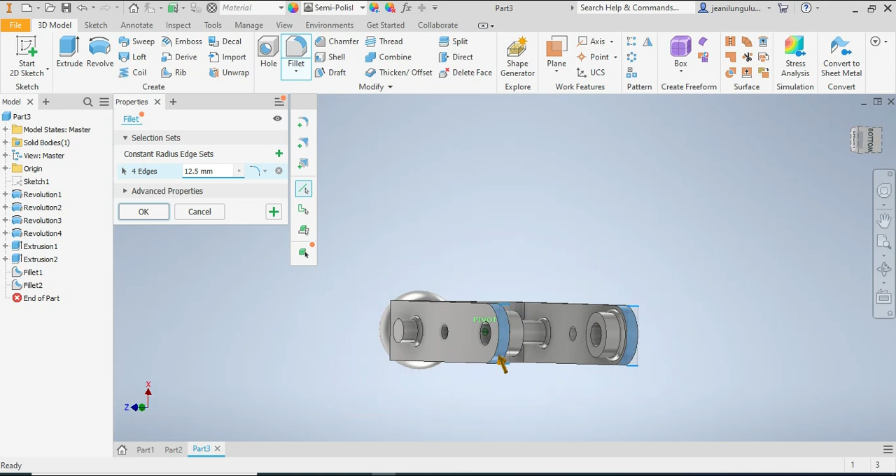Let's say that you have to draw this drawing in front of us. I'm going to show you how it is. We don't know if this is an assembly or what, but I'm going to try to draw it as a whole, as one drawing, since I didn't say it's an assembly. So I'm going to start a new sketch, metric, standard millimeter, and click create.

Once I'm in here, I'm going to go for sketch and start with a line. This line here is for guidance, just a reference one. I want it to be 400 millimeters. Remember, it's just for reference, you don't have to draw this, but it's easier this way.

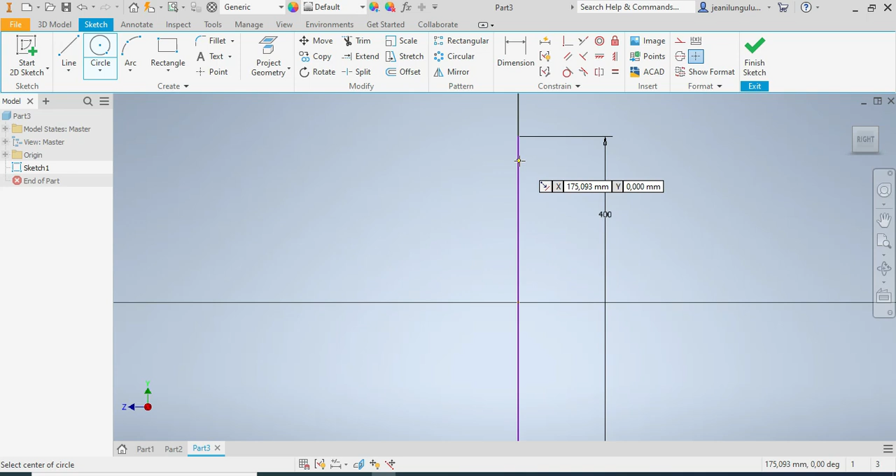Okay, now I'm going to go for a circle. There is my circle, and this one needs to be 33 millimeters.

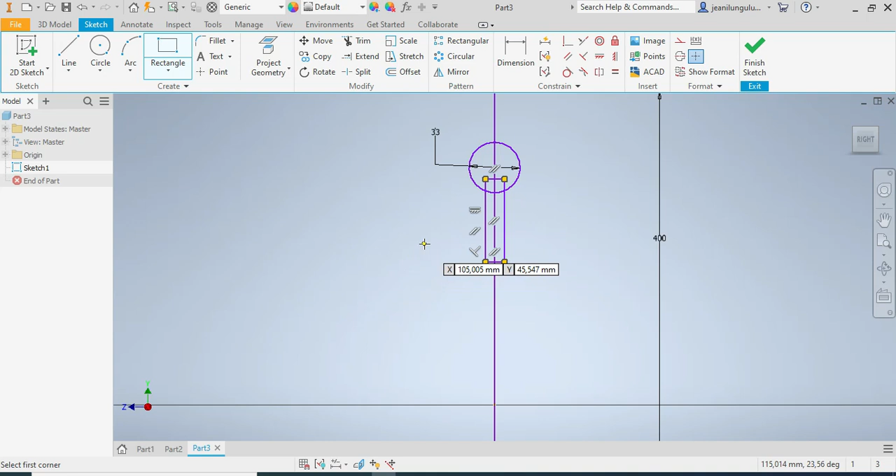Then I'm going to go for this rectangle, like this. And again, another rectangle, this one will be like this. So now I want from there up to there to be 38 millimeters.

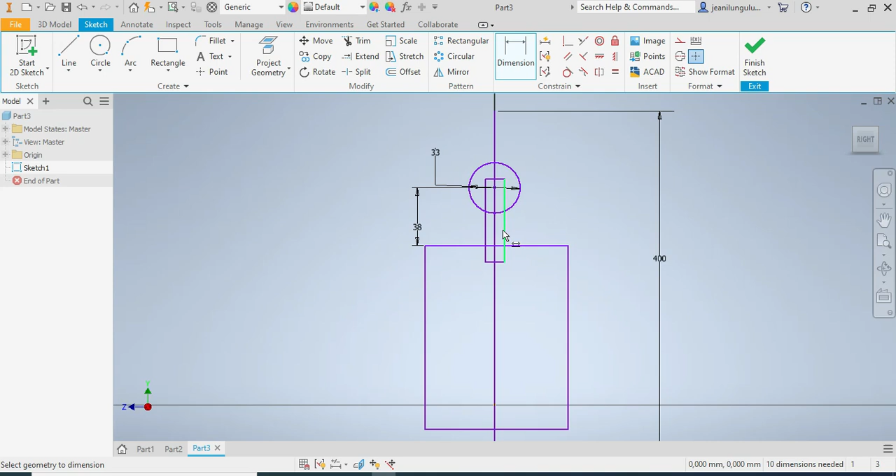And I want this one here - how long is that? We're going to come back to that later. So I'm going to draw another rectangle again, there goes that one. From there up to there, that one needs to be 5 millimeters.

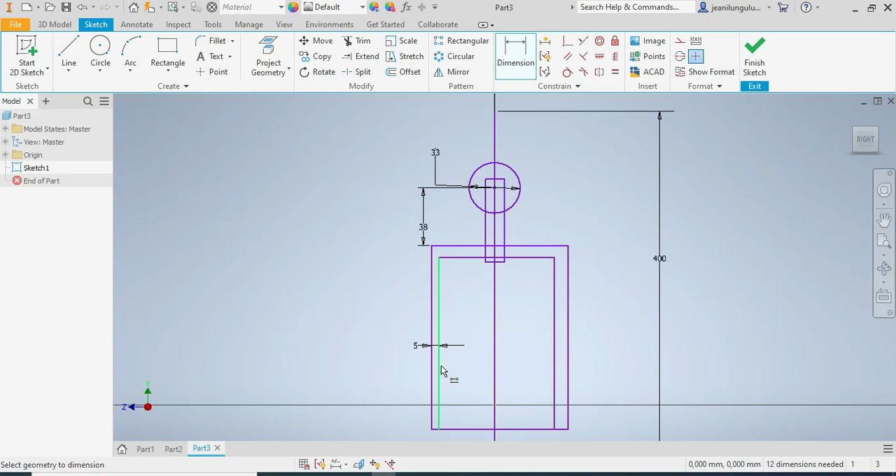And from there up to there, that one needs to be... 19 plus 8, which is 27. So that needs to be 27. And I'm going to make sure that this one is 10 millimeters. And from there up to there, that one needs to be 5 millimeters - you see it moved, so 5 millimeters.

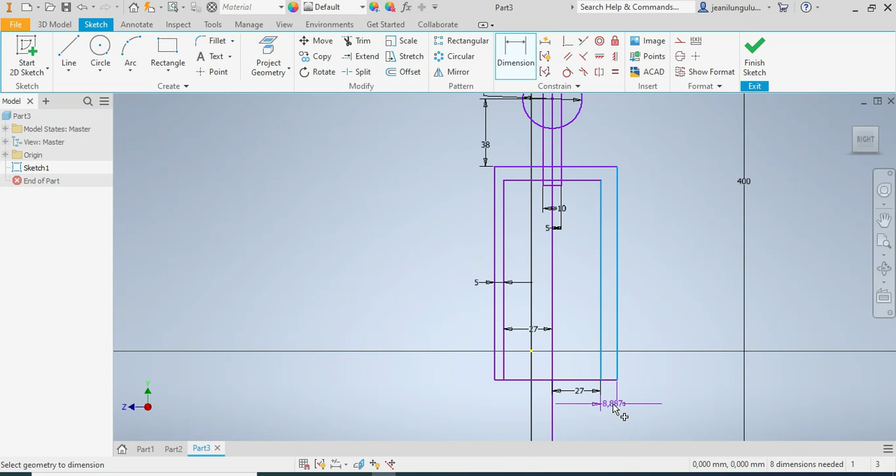Now I'm going to go for this one. This side as well, this one needs to be 27, so that needs to be 27. And that one needs to be 5. Don't worry if your drawing is moving, it's not a big issue. You can still click on escape and click there to bring it back. This is up to you, so it's not a big issue, you can bring it up to there.

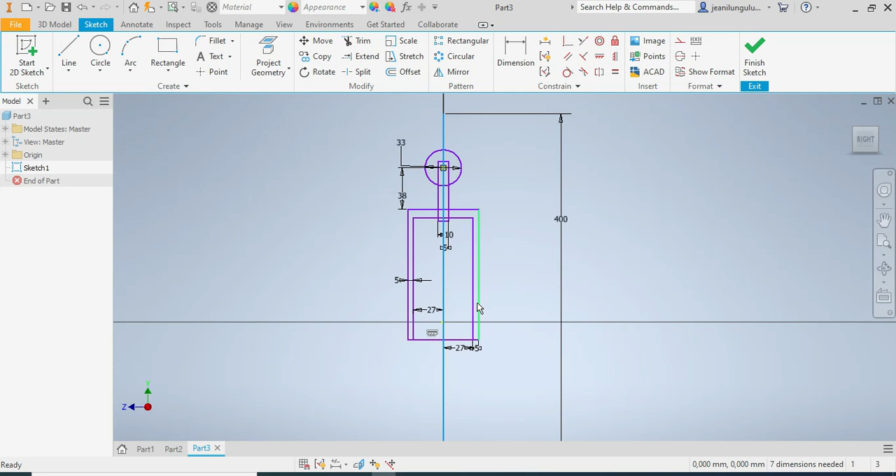Once you have that in place, what you're going to do now is go for these parts here. I'm going to draw a rectangle, there is my rectangle, I'm going to draw it like this. That's one plus that one. You can follow me step by step, it's up to you.

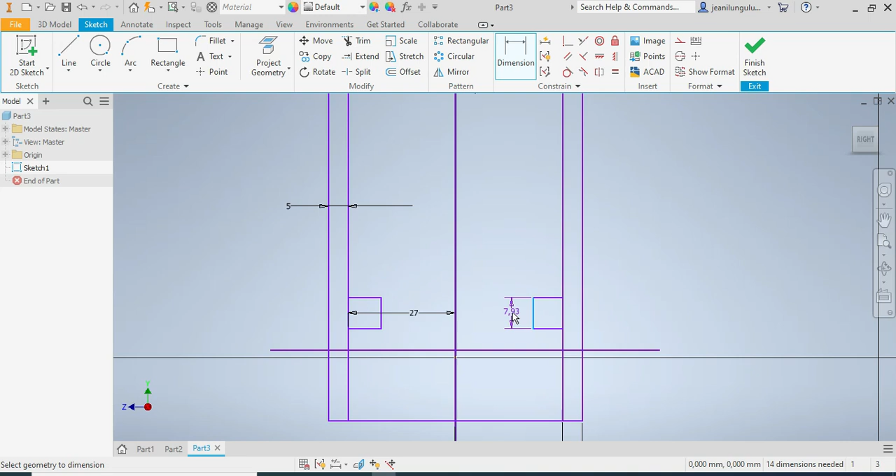So now I'm going to have this axis there. I want this one here to be 19, so 19 divided by 2 is 9.5. 9.5 minus 5, that will be... 4.5. That will be 4.5.

So 9.5 minus 5 is 4.5. And this one here will be 8, and that one will be 8 as well. So this is 4.5, as you can see.

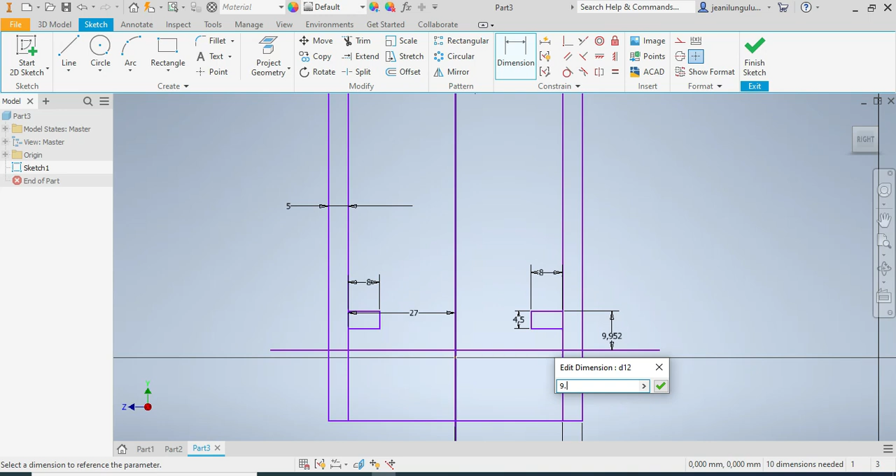What I want now is from there up to there to be 9.5. So that needs to be 9.5. The same applies there - 9.5, let's see, yes, 9.5.

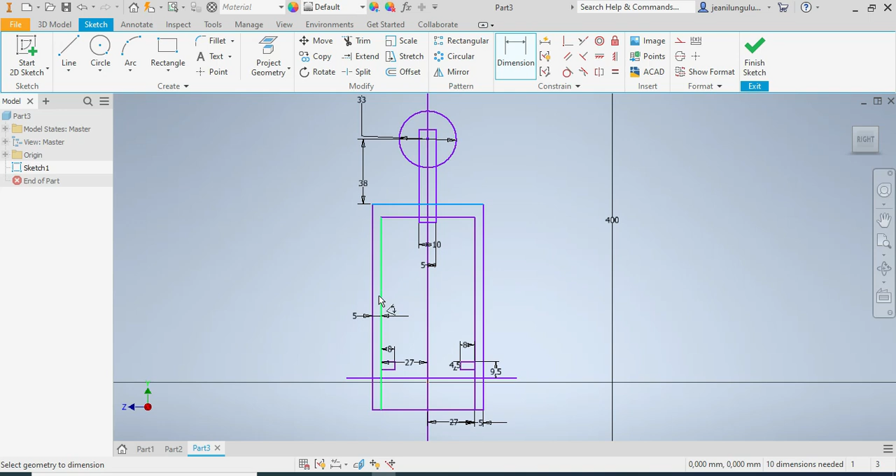Once I have that in place, the next thing I need to do is figure out what dimension do I need. From there up to there, that should be 84. Enter, that should be 84.

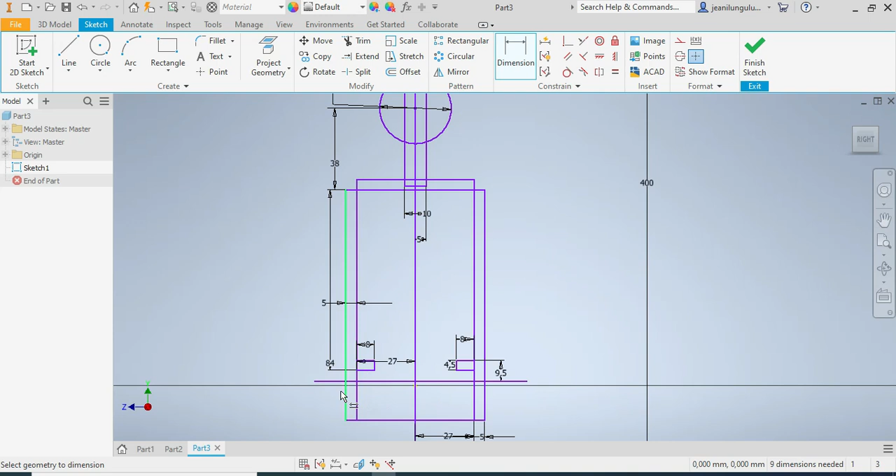What else do I need? I think I have that one. And now I want this one here to be... 101.5. Enter. So once I have that in place, okay.

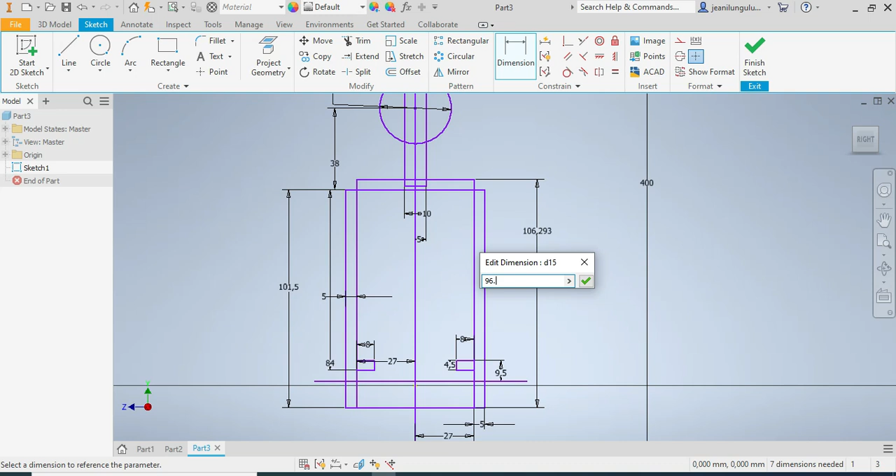So I'm missing that one over there. So this one needs to be... that's 101.5 minus 5. So that one should be 96.5. Enter. That is great.

So the next thing I want, I'm going to give dimension to this one. This one here can be 54, so let's make it 54. But I'm going to have to pull it down. So that's one, let's see how big it is now - 90.8, I can make it 80. Let's click on it. 80. Enter. Okay.

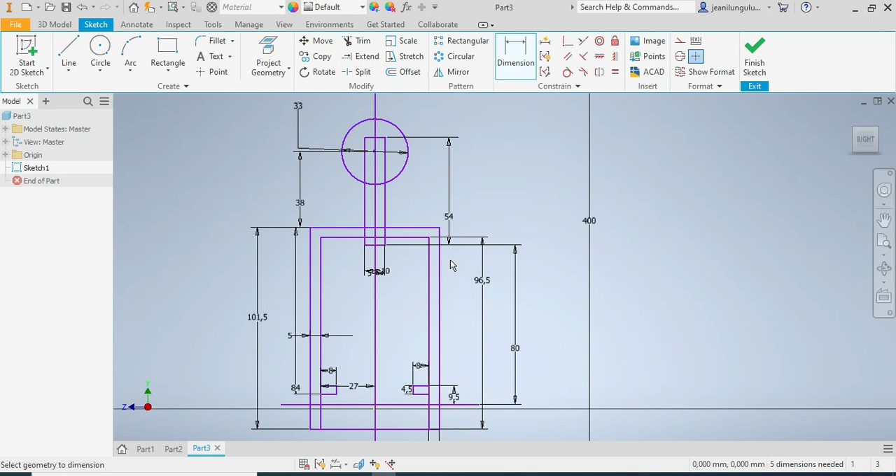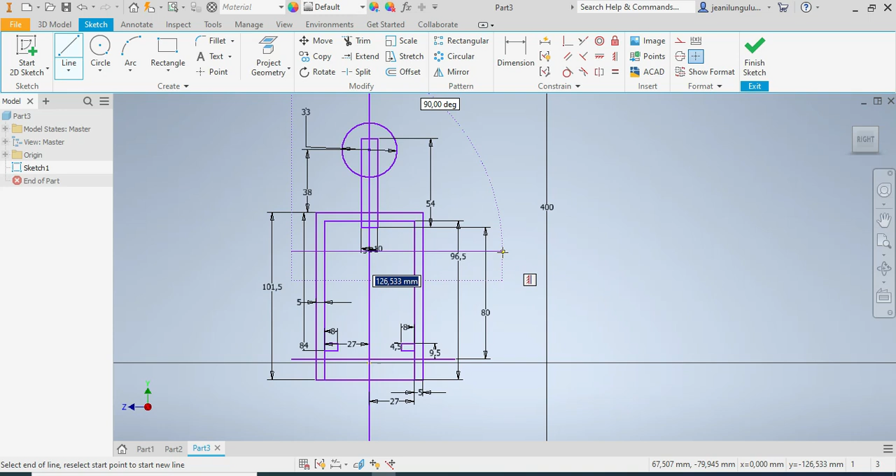Once I have that in place, I think what else do I need? I think I have everything that I need - I have that one, I have those ones. So now I need this. I'm going to draw first, let me go for this line, I'm going to have this line there. These lines that I'm drawing are axes, just there for guidance. I'm going to go escape, then I'll have this one.

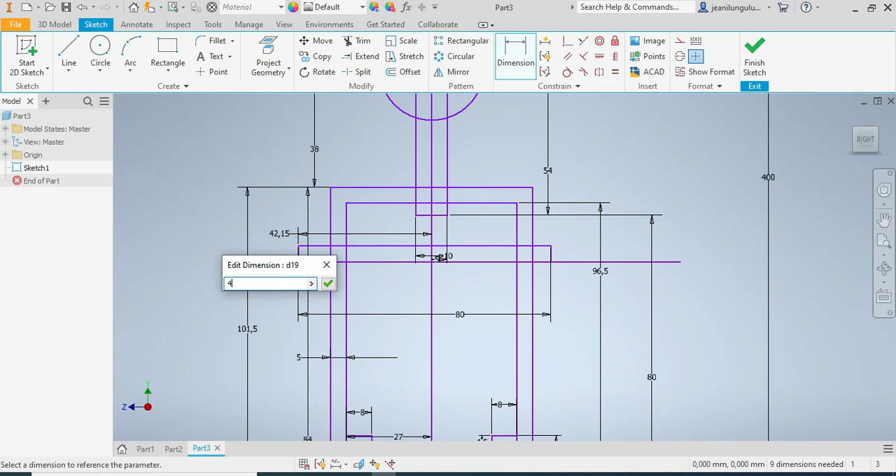Let's go like this, that is fine. So that one needs to be how much? Let's go for 80. 80 is okay, let's go for 80. Enter. Then from there up to there, that one needs to be 40. So 40, that's great. Okay.

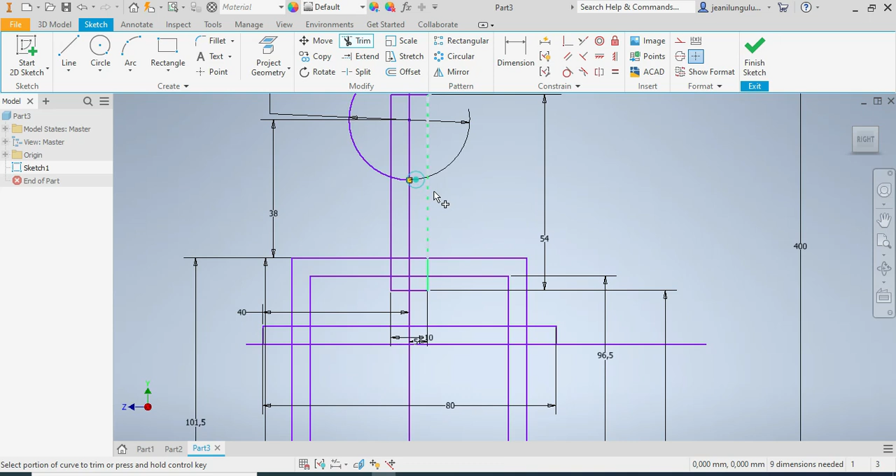So again, supposing that this one is not an assembly, okay? According to the information that I have, it does not say that it's an assembly. So what I'm gonna do now is trim what I need. I'm gonna trim this part, I'm gonna trim this part as well, I'm gonna trim this part, right? I'll come here and trim this part, that part. Escape. You can just click on it and say delete.

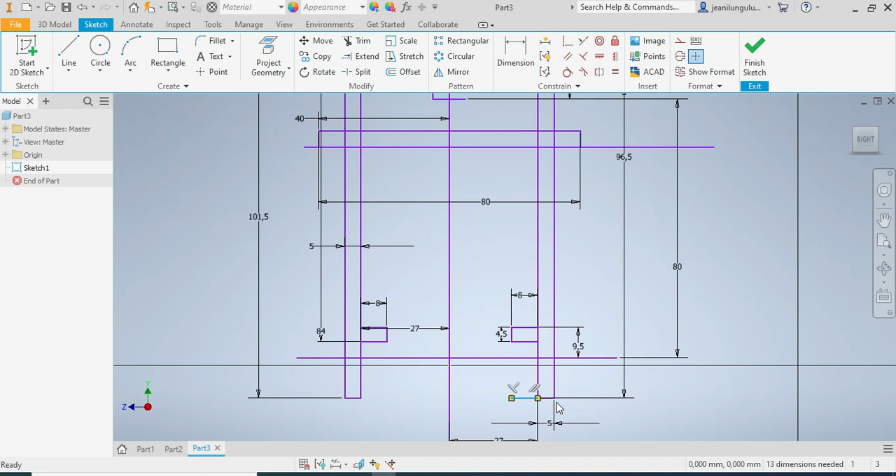Okay, so once you have that, what you can do next is trim this part as well. So that's one, okay. Trimming that part, escape, so just click on it, say delete. Alright, I think that's it, right?

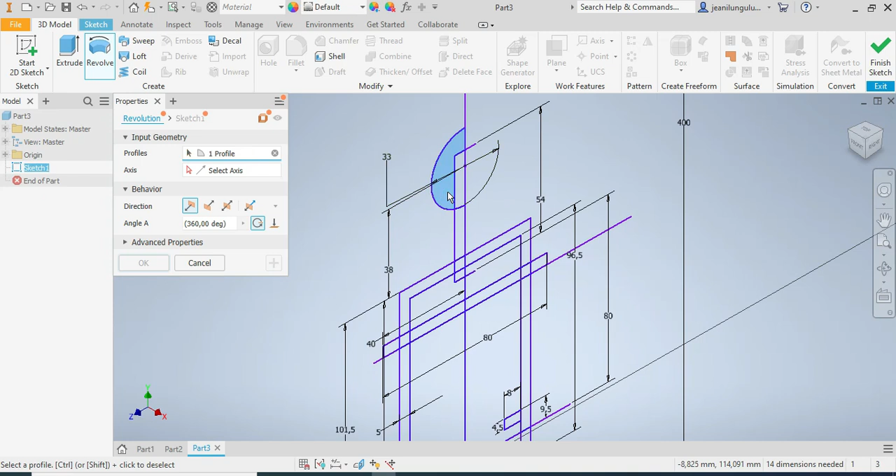So what you can do now, as I said, you can either click finish sketch, does not matter. So you go into 3D model, and then you go revolve. Okay, so first I'm gonna revolve this part, I'm gonna revolve that part against which axis. You're gonna click on that axis, so that axis, you say okay.

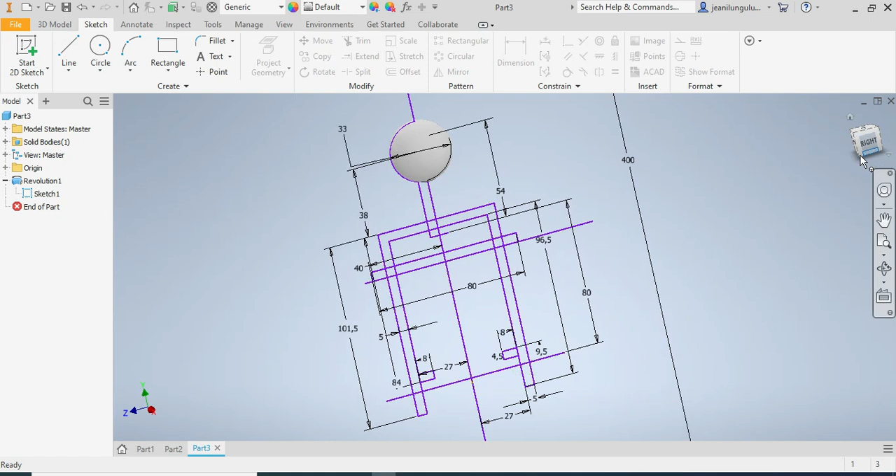So once that is done, you're gonna see the drawing is gone. You're gonna come there, you go on sketch, you right click, you say visibility on. So once the visibility is on, you come here again, okay, to the model, you click on revolve.

So you want to revolve this part here, that spot, against this axis, okay, against that axis. So what you can do is you click on there, you say revolve. That is revolved, don't worry about it, you're gonna see how your drawing will be like.

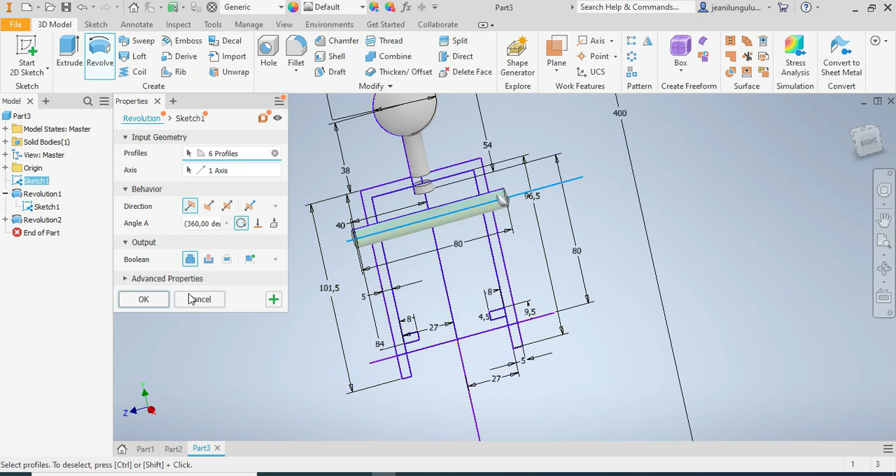So that is done, again you click on revolve, so you want to revolve this spot against this axis, okay you see, so you have that one. Revolve again, so you want to revolve this spot and that spot against this axis. So that is done, that is done, sorry, so you can see that.

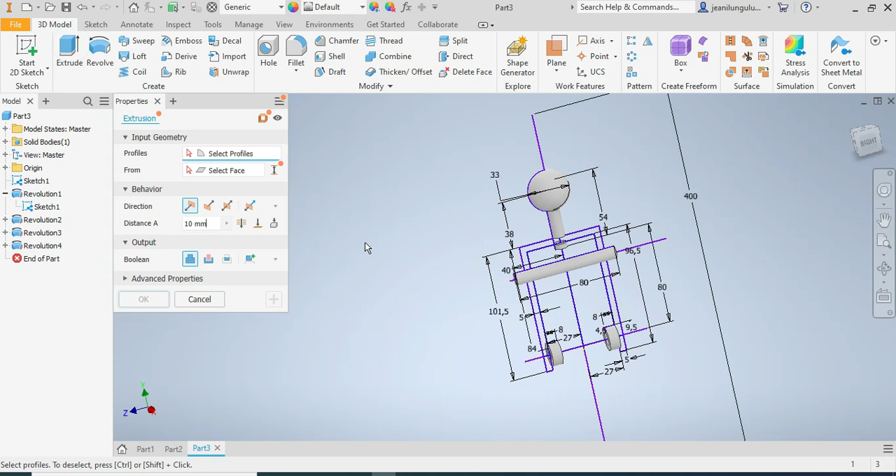You say okay, so the next thing that you want now is to extrude. So you want to extrude this part here, this whole part, you can see. So now you want to extrude it by what? 25 millimeters, so 25, okay.

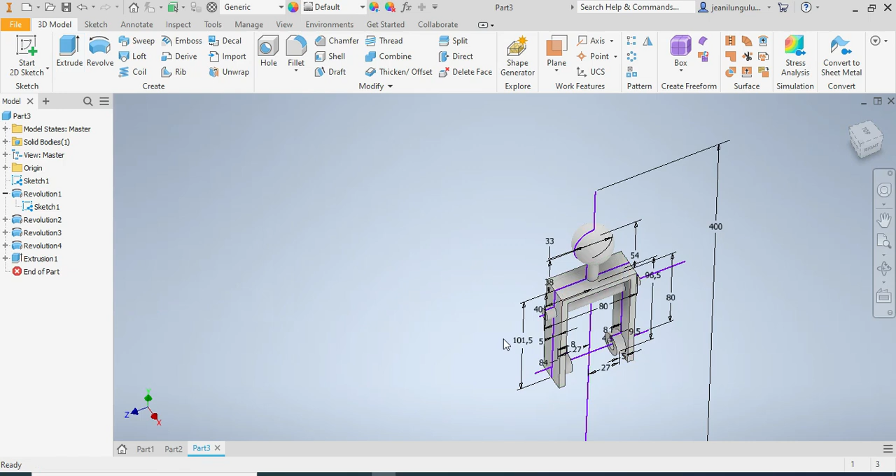But you need to go both sides of your main plane, so you're gonna click on there, now it goes that way, symmetric. Now you say okay, so now that you have that in place, right? So what you can do next now is come here, click on visibility, say visibility off, right? So once the visibility is off, this is how your drawing looks like, but you're not done yet, right?

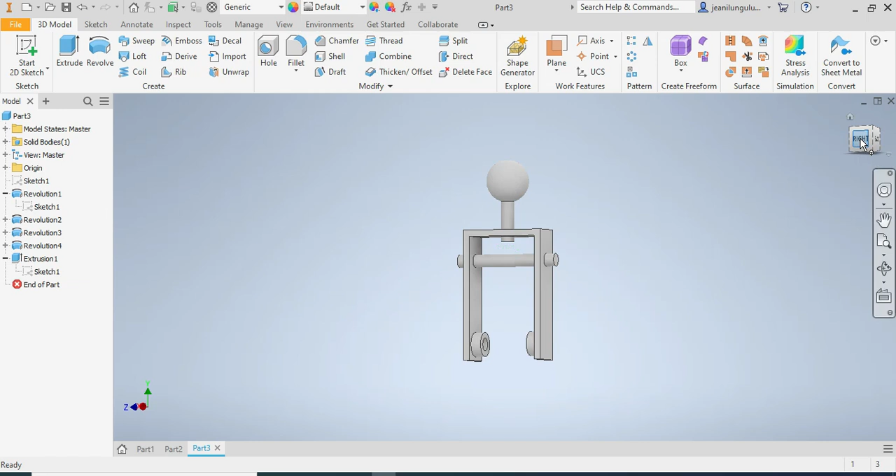So next, what you need to do is come for the drawing here. Okay, so you click there, you say new sketch. Okay, so you can even do like this, you don't have to worry about the next thing. So now you can see you have that one there.

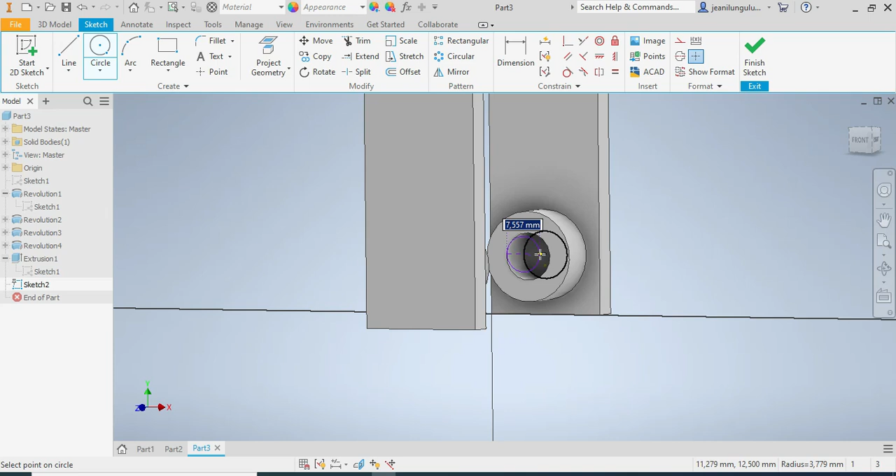It matches there, okay, once you give it the dimension, you're gonna see that it's gonna be okay. And then you come there as well, we do another drawing there. That one there needs to be what, 6 millimeters, so they need to be 6 millimeters. That one needs to be what, 10 millimeters, so that needs to be 10 millimeters.

So enter. The next thing we want is from there up to there, that one needs to be what, 36 millimeters, 38, so that needs to be 38 millimeters. So enter, once you're done, you come on 3D extrude.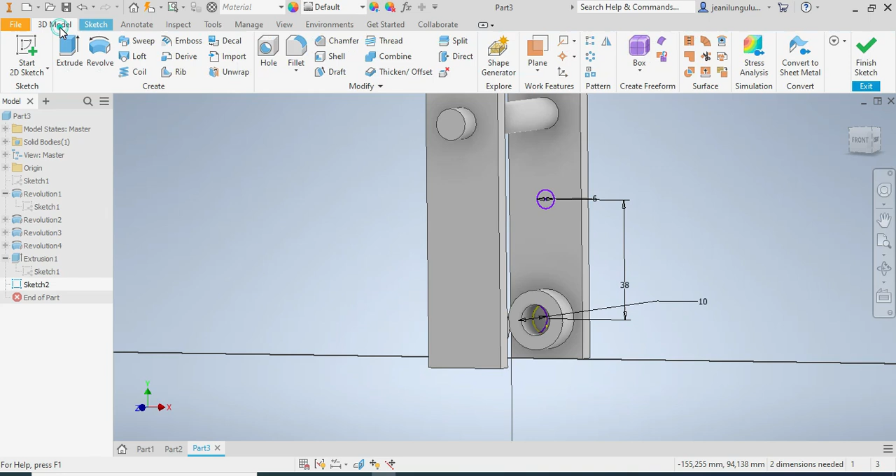Check again, so you want to extrude that spot and that spot. So that one you can give it even 100, okay, just to be covered. 100, see, check out it's gonna be like. Oh, let's give it even 1,000, you know, it's fine. And then we're gonna go both sides like that.

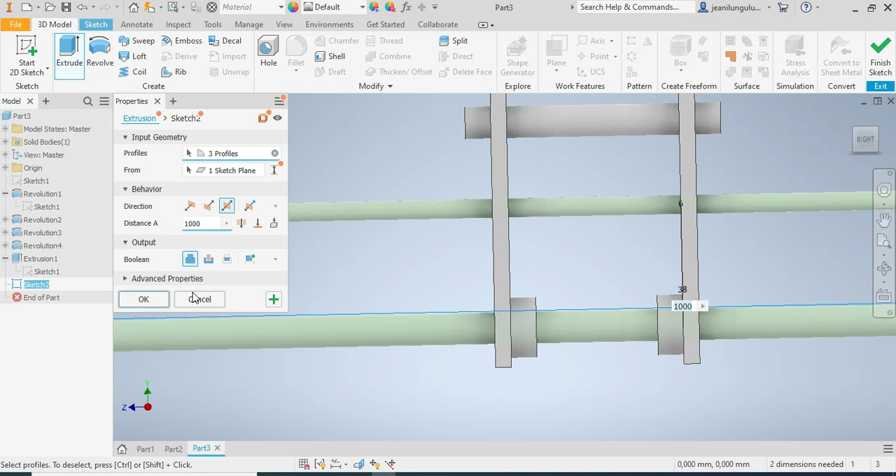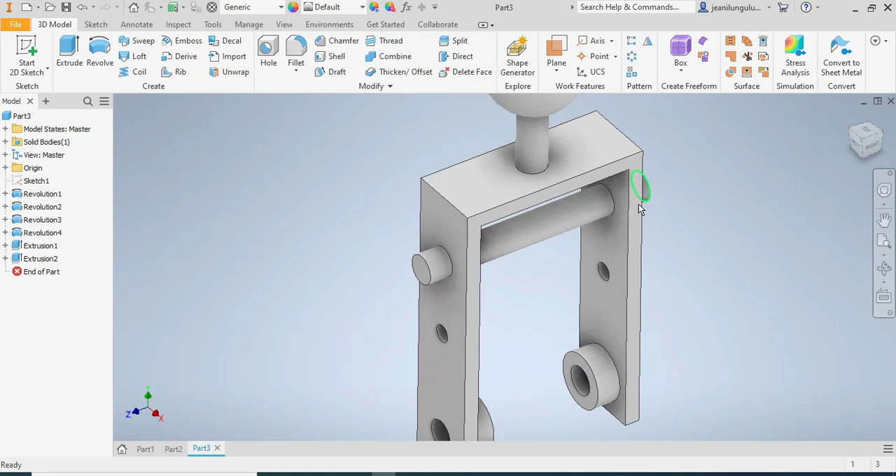So now what we're gonna do now, you're gonna come there, okay, you right click, then you're gonna fillet. Okay, so that one there, I want it to have a fillet of what? Let's put 1.5. 1.5, so now reverse it, invert it, sorry.

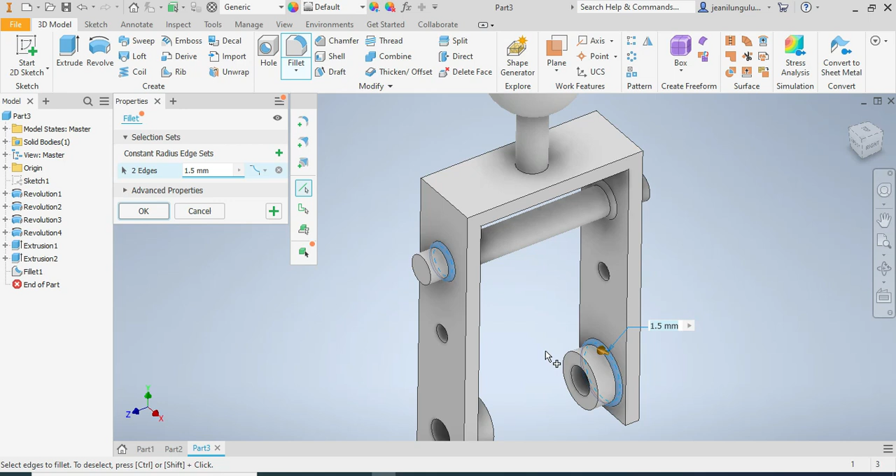So I'm gonna add this one, can do it, so I'm gonna add this one there and invert it, or click on control. That's one as well. That's one as well. Where again? I was clicking on control, so alt control. That's one as well. Alt control, come on, that's one as well.

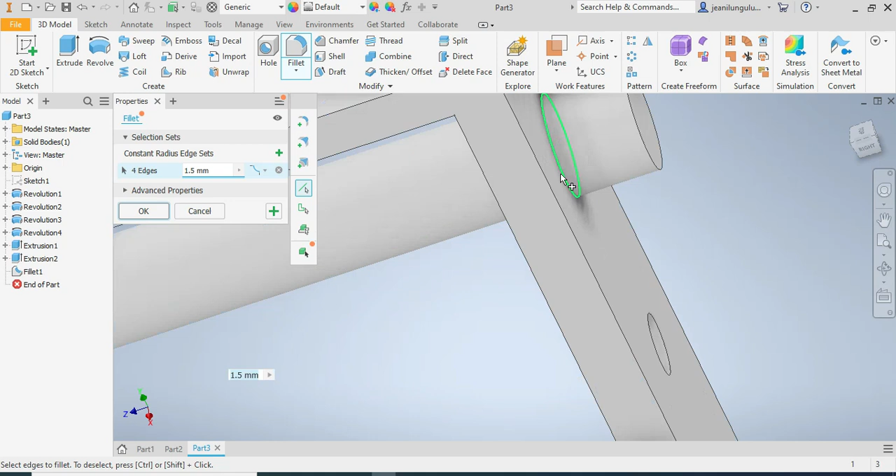That's one, okay, so now that everything is done, or I think down there as well. Control, that's one, control the keyboard, right? So that is done, then you say okay. So this is how your drawing now looks like.

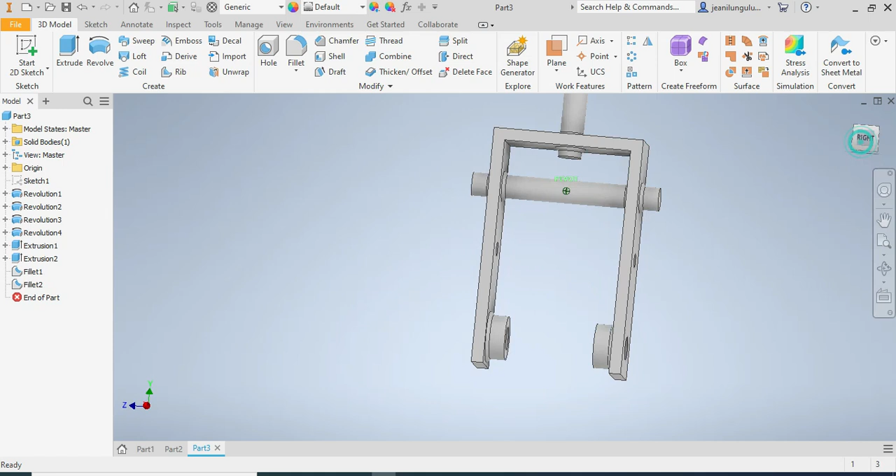Okay, easy, right? I mean, this is why I wanted to share, as somebody approached me so that I could share this one. So it was a pleasure of mine sharing this with you. I hope that you enjoyed it, I hope that you're gonna enjoy it.